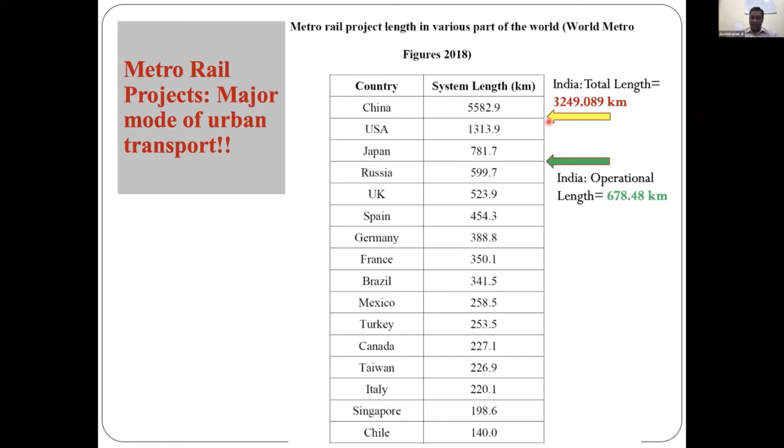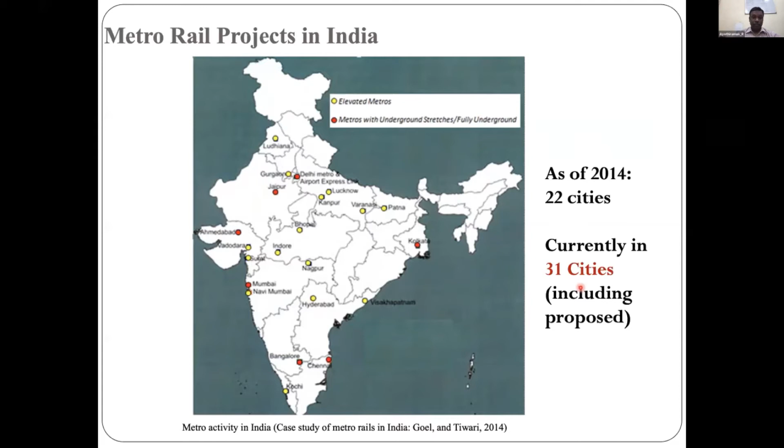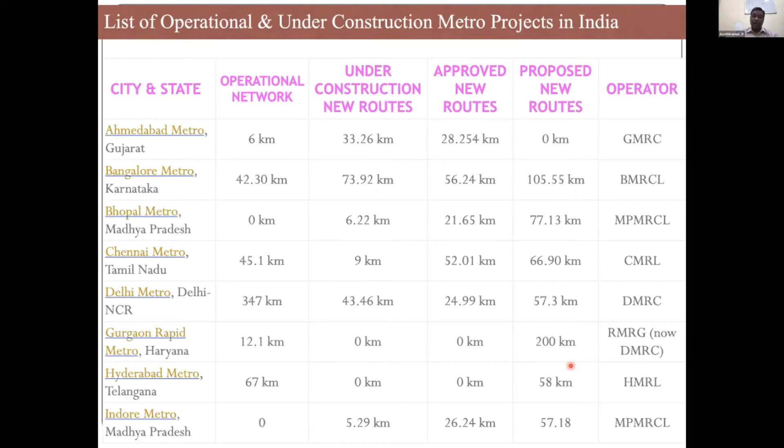So this is going to be one of the lifelines of transportation in the country. This table summarizes what is operational, what is under construction in several metro cities, and the approved and proposed ones. Even in the recent planning and budget, a huge amount of funds has been diverted for metro construction.

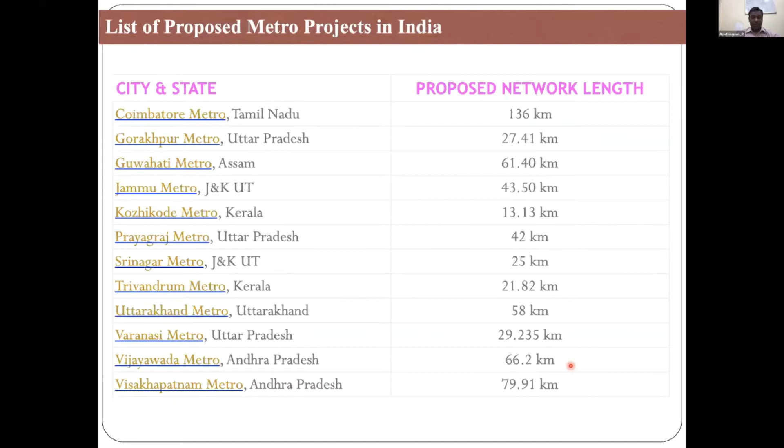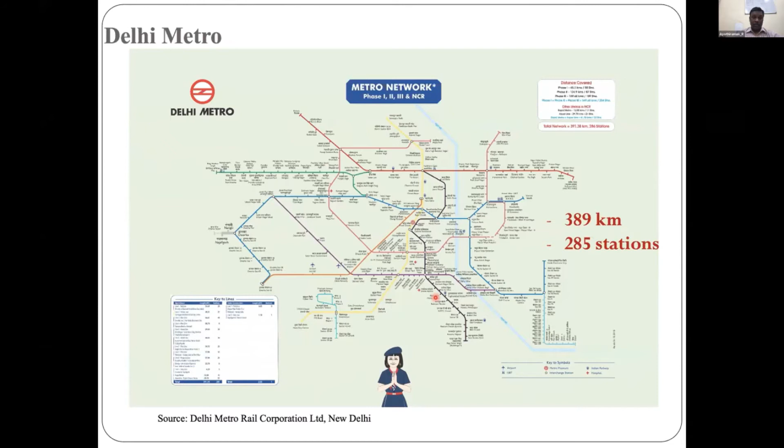So these are different cities where the status of the work is shown, and some of these cities are going to have metro projects for the first time. It is functioning very successfully. 389 kilometers of metro is functional, and especially there are several lines where underground tunnels were constructed. So these metro transports can be elevated or underground.

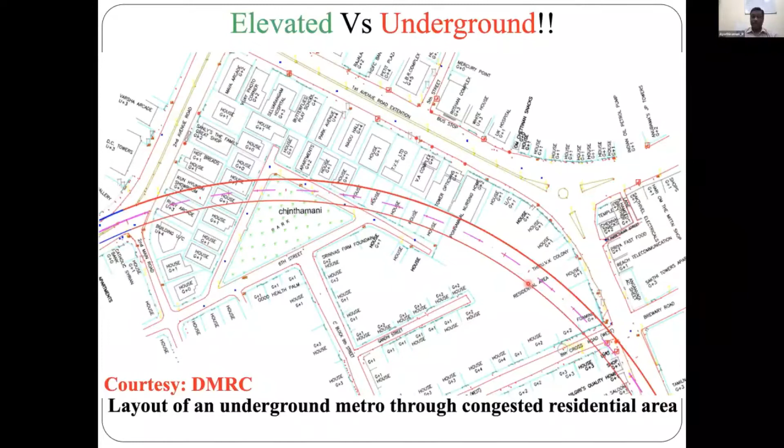Elevated is the more convenient and cheaper way of construction, whereas underground construction is the most challenging. But it is unavoidable to have underground metro construction, because you can see very densely populated residential areas, and you have to take the metro underground below these buildings. So the challenge comes in how to ensure the safety of existing buildings above this tunnel construction, and the construction cost and time also increase significantly. But without other options, we are forced to go for underground construction in some areas of the metro alignment.

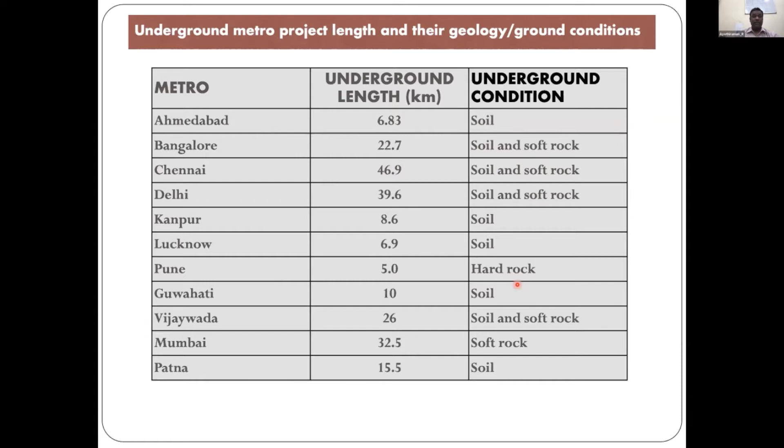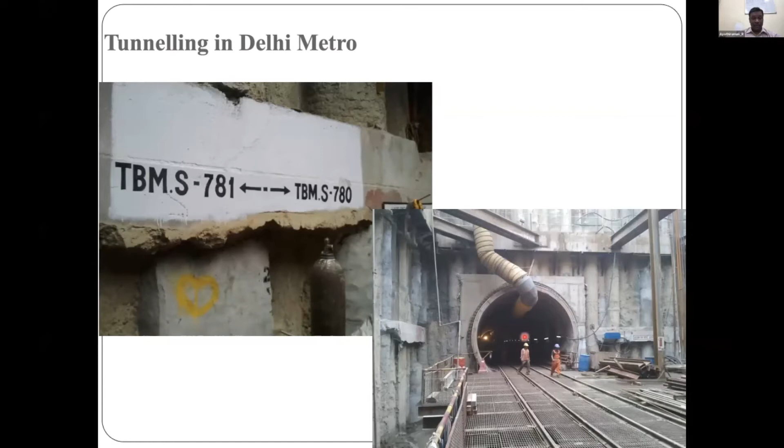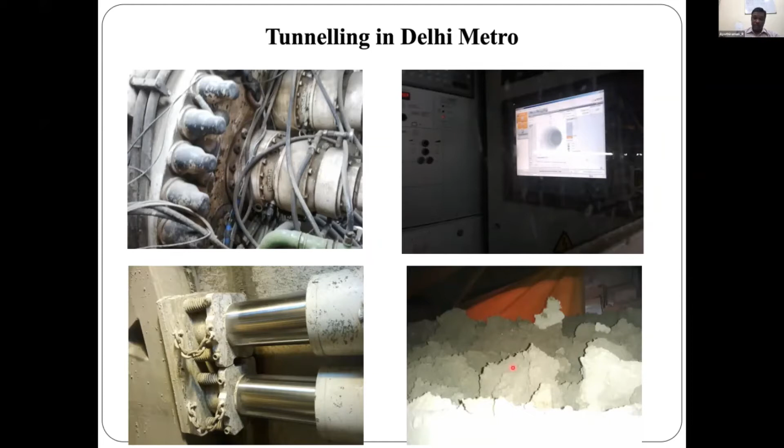What is the volume loss, how much face pressure has to be applied, and how much volume loss is happening - as a result, settlements are monitored at the surface, and segmental linings are installed by jacking. This is how the soil is collected through a muck conveyor belt and excavation is done. These tunnels have segmental linings which are finally connected together and installed by jacking.

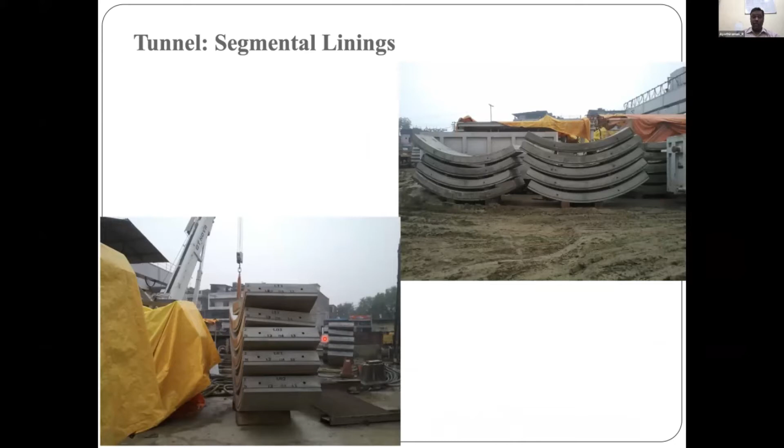So the major challenges in urban areas - since we are doing tunneling underground, there are structures above ground with foundations that come into close vicinity. We need to take care of their safety. There are two possible scenarios we can look at. One is during tunneling, how much damage would happen to the surrounding buildings and other subsurface structures and utilities - we need to protect them.

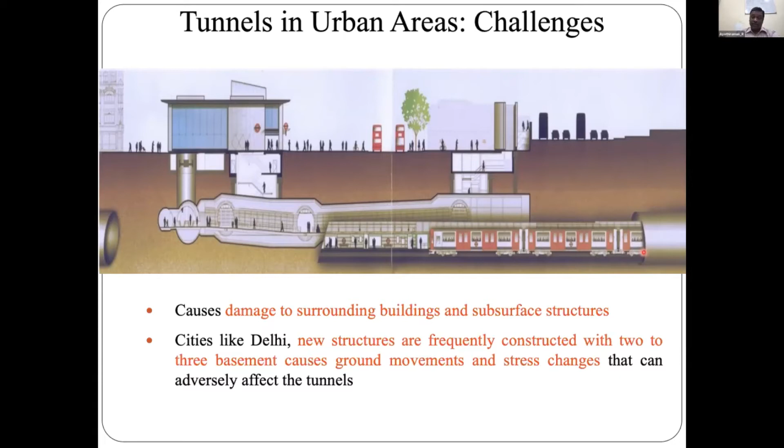Now you can see so many projects have already become functional. The other possible scenario is these tunnels already exist, and these tunnel and metro alignments have become a major point of attraction. So a lot of future development happens close to this metro alignment. Eventually any new construction activity can also affect the performance of the existing tunnel. So we need to assess and ensure the safety of the tunnels after construction as well.

So you can see the pile foundations are typically deep foundations, and the tunnels also vary from 10 to 30 meters in depth. They will come into close contact, and as a result they may have interaction. And if these tunnels are located in a seismically active region, then their interaction under seismic load also needs to be understood and designed for accordingly.

Nowadays buildings with basements are coming, so eventually they will also extend to relatively deeper depths. They can also have interaction with the existing tunnel. So we need to study the interaction of shallow foundations as well, both under static and seismic loading.

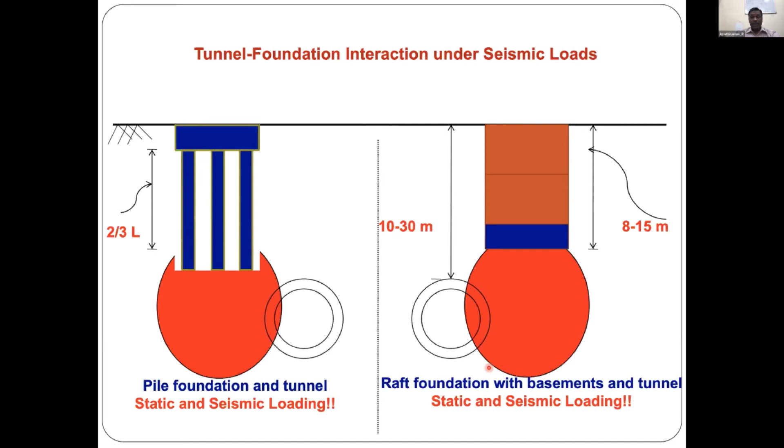All of us know in India what is the significance of seismicity. Some of the cities where metro systems are already functional come under zone 2 to zone 4. Delhi comes in zone 4 with a zonal factor of 0.24.

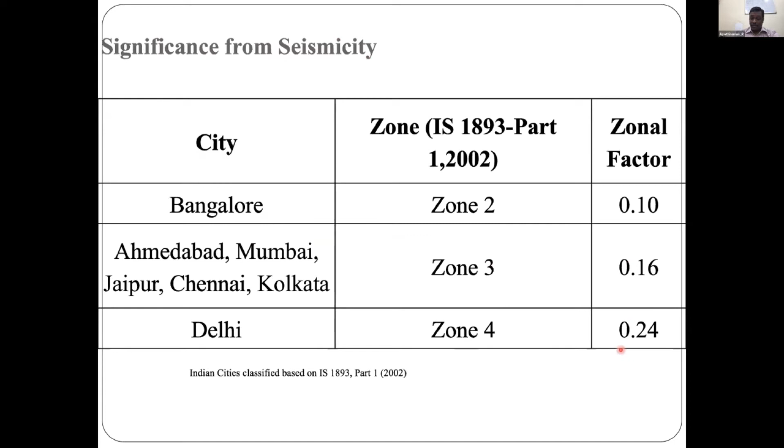What is the current state of practice with respect to tunnel design and its relevance? Generally people assume that tunnel structures, underground structures, are relatively safe compared to surface structures when subjected to earthquake load. But this has become a question because there are several case histories where earthquakes have caused significant damage to tunnels as well, underground tunnels included.

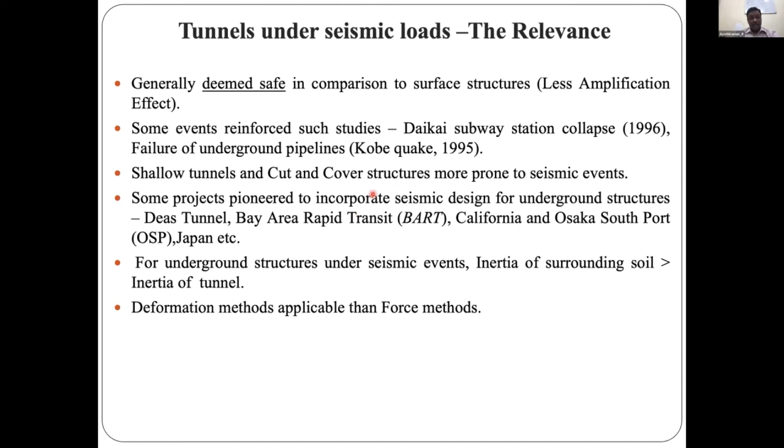Let us see some of the case studies highlighted in the literature. It is reported that these are the parameters that affect the seismic response of tunnels: one is the relative stiffness of the liner and the tunnel depth, and obviously the peak ground motion parameters of the earthquake, the duration, and the predominant frequency of the earthquake. These are the critical parameters affecting the performance and damage of tunnels during earthquakes.

There are 192 cases of tunnel failure that were analyzed and reported by several researchers, and we will see the summary of that.

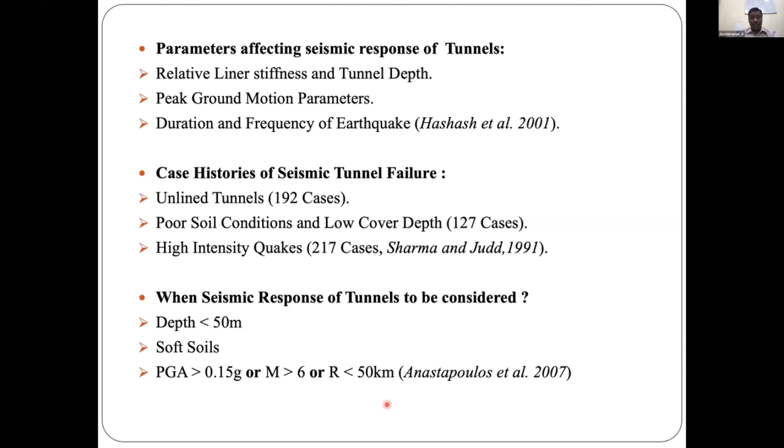Typically, when to consider the seismic response of the tunnel and take it into account in the design: whenever the tunnel depth is less than 50 meters, typically in soft soils, and if your PGA is greater than 0.15 G, or magnitude is greater than 6, or epicentral distance is below 50 kilometers, then we need to take into account the seismic design of tunnels, as follows.

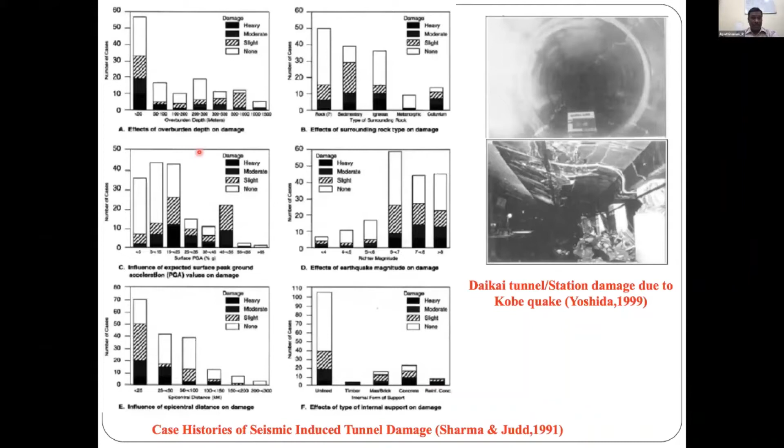These are the case histories which were analyzed to find out the causes of damage, whether it is the effect of overburden depth, the effect of surrounding rock conditions, the magnitude of the earthquake, how it caused damage to different numbers of tunnels, and what is the influence of the peak acceleration value on the damage, and similarly the epicentral distance. All these were categorically discussed by Sharma and Judd 1991.

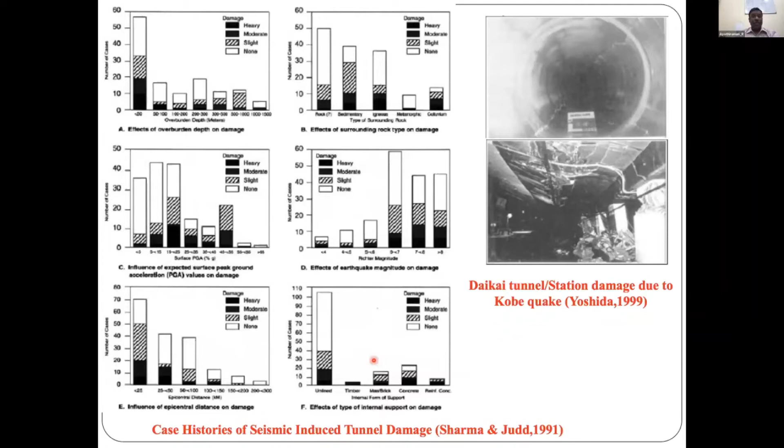So it clearly shows that tunnels do undergo damage during earthquakes, so we need to design them accordingly.

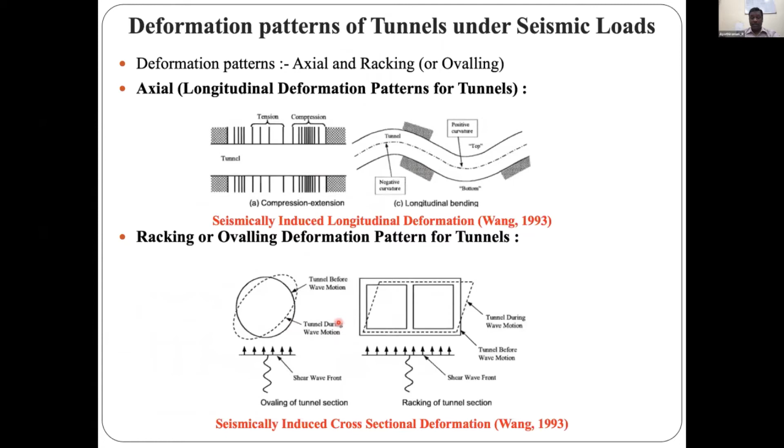So this is what I would like to summarize again: what are the different possible interactions that can occur. Of course, when you construct a tunnel in soil, that soil-tunnel interaction needs to be understood even under static load. But metro tunnels are typically at close distance.

They are twin tunnels, so therefore the interaction between the adjacent tunnel, the second tunnel, also needs to be understood, because the in-between soil, what we call the pillar width, plays a critical role in affecting the interaction between the tunnels as well. And of course, subsequently, there are two other types of problems.

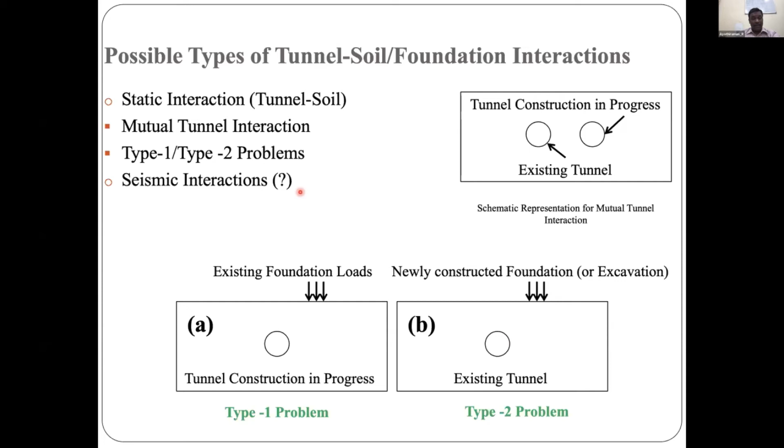Type 1 problem is where the tunnel is constructed, and what is the response of the existing foundations? Then the type 2 problem is where the tunnel already exists and there are new construction activities, whether excavation or foundation loading, and how they will affect the response of the existing tunnel. And of course, in seismically active regions, how the earthquake loading needs to be considered.

So today's presentation, I'll mostly focus on the seismic design related issues, not the static interaction part. The most common methods adopted in the analysis of underground structures are the quasi-static analysis considering the free field method assumptions. There are also closed form solutions given by Penzien and Wang, which can be used for a circular cross section of the tunnels.

Quasi-static analysis by the racking method, considering deformations, can also be used. We can do a numerical analysis incorporating this quasi-static approach as well, and then a time history full dynamic analysis can also be performed.

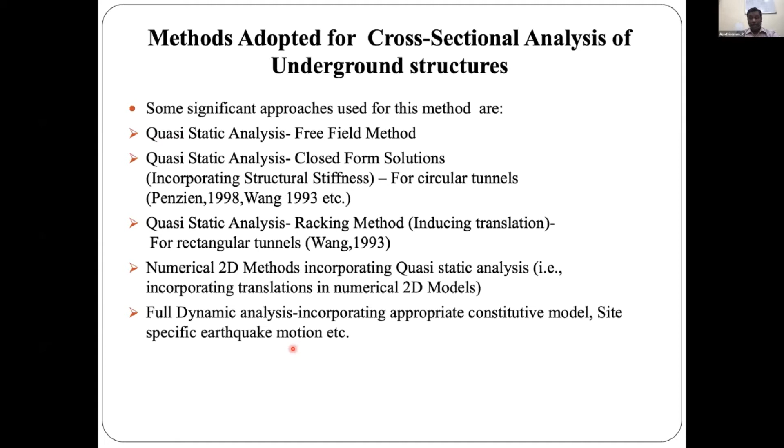So today we will be discussing the case study of Delhi Metro, starting from a pseudo-static approach to quasi-static approach and then a full dynamic analysis. We'll be talking about how different methods can give different results and which one would be most appropriate to use.

In tunnel design, one important factor we need to understand is the flexibility ratio, which represents the relative stiffness of the tunnel lining and the surrounding soil. This plays an important role.

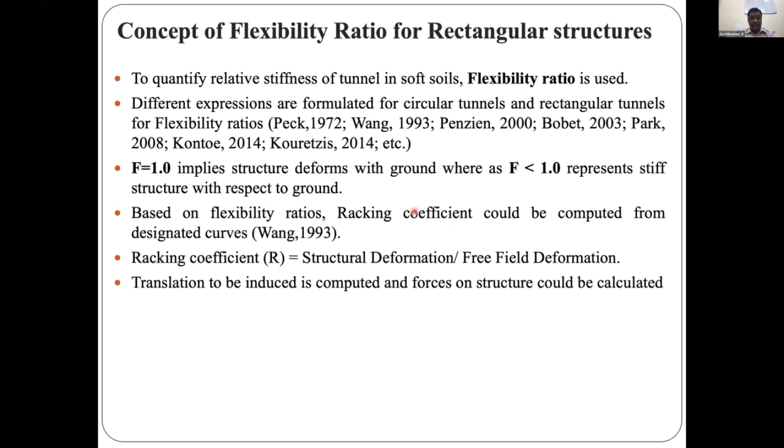There is a reduction factor, or racking coefficient, applied when we do the analysis and design using the free field deformation approach. The structural deformation to be applied for the racking analysis is obtained by multiplying the free field deformation by the racking coefficient, which is a function of the flexibility ratio.

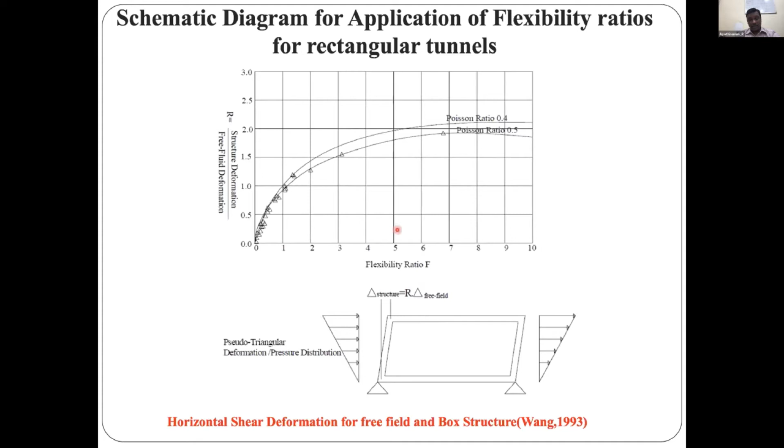Another challenge is the segmental lining being used, which has joints. What would be the effect of these segmental joints? For a realistic analysis and design, one must model the joint condition in the numerical analysis as it actually prevails in the field.

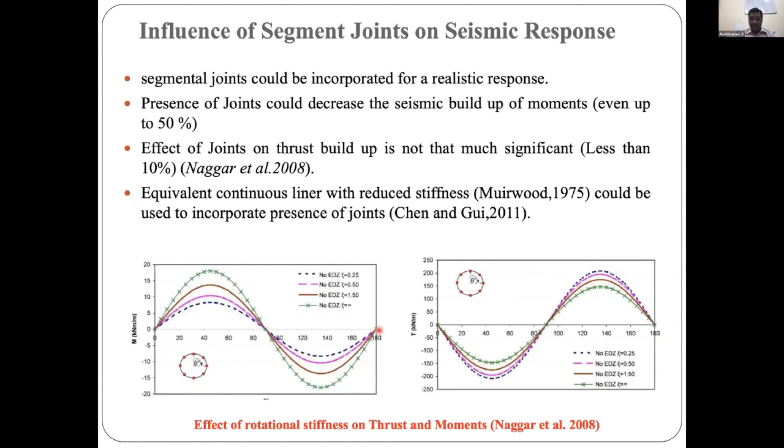Naggar has done an analysis and found that the joint stiffness does affect the moment and thrust that are mobilized in the tunnel lining. So in our Delhi Metro analysis, we did consider segmental joint modeling.

In soil engineering problems, simplified elastic analysis or elastoplastic analysis, the soil constitutive model does affect the final output of moment and thrust coming on the liner. So we have to choose the constitutive soil model very judiciously, depending on the actual soil condition, for a more representative result.

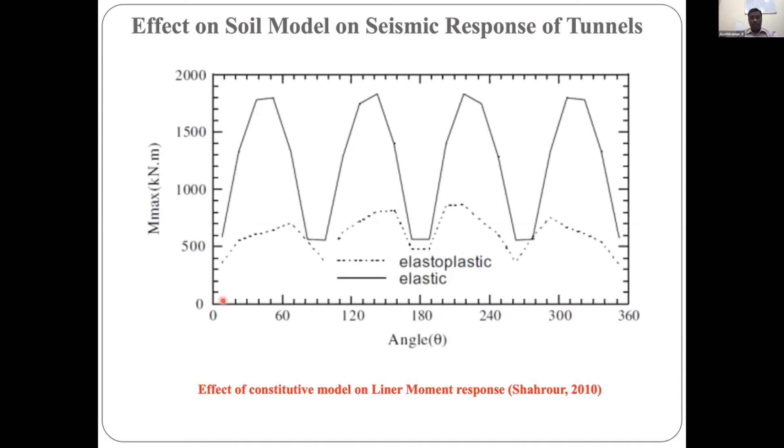Modeling the behavior, some full dynamic analysis results reported in literature show that as the PGA increases, both axial thrust and bending moment on the lining increase.

But again, this thrust and bending moment need to be reduced depending on the flexibility factor, because flexibility is one of the important factors. So they can be reduced based on the flexibility value.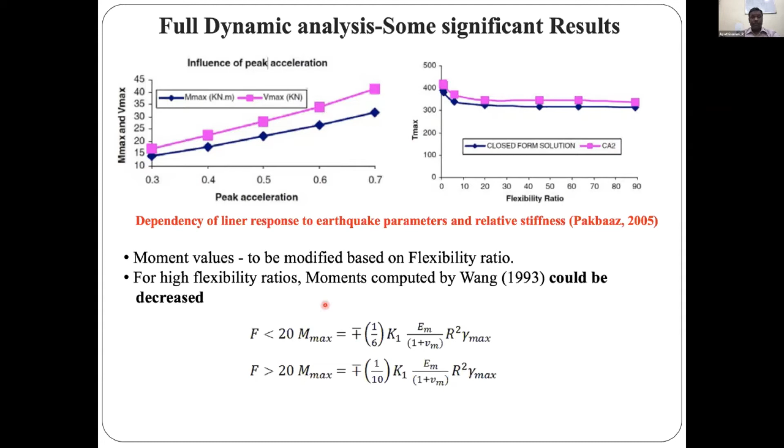Certain parts of Delhi have a shallow water table and sandy, liquefiable soil conditions in the Yamuna River Basin. So we had to arrive at different constitutive models for liquefiable and non-liquefiable soil conditions, and these parameters have to be site specific. For seismic loading, we also have to get the damping characteristics to be very representative.

The challenges are how to arrive at site specific ground motion characteristics and how we are going to simulate the segmental joints in the modeling. Also, we should be able to ensure the face stability, which is actually obtained in the TBM machine by applying appropriate face pressure.

Even numerically, you need to apply appropriate face pressure value in order to simulate conditions close to the field. The segmental linings are installed by jacking - even that has to be numerically simulated, and how much jack force we should apply in the numerical analysis is also a big challenge.

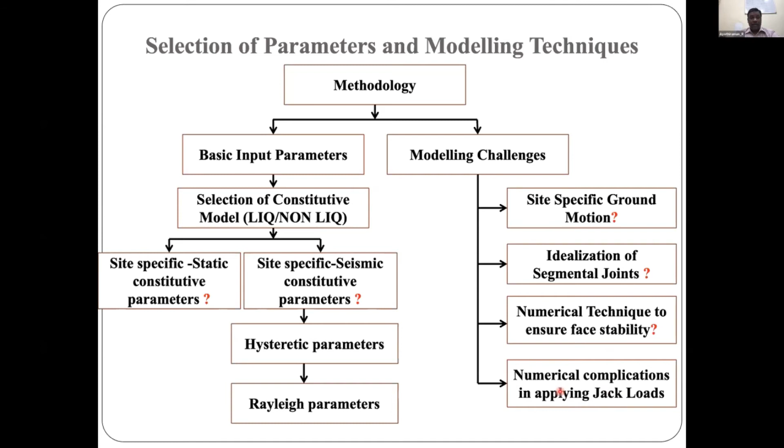So these are the things we have simulated as close to the field condition as possible in our analysis and design. We have to arrive at these parameters because most conventional geotechnical investigation reports will only have an SPT profile.

We did have a shear velocity profile for select locations in the Delhi region, but if not available, we used correlations to convert from the SPT value to arrive at the shear velocity profile.

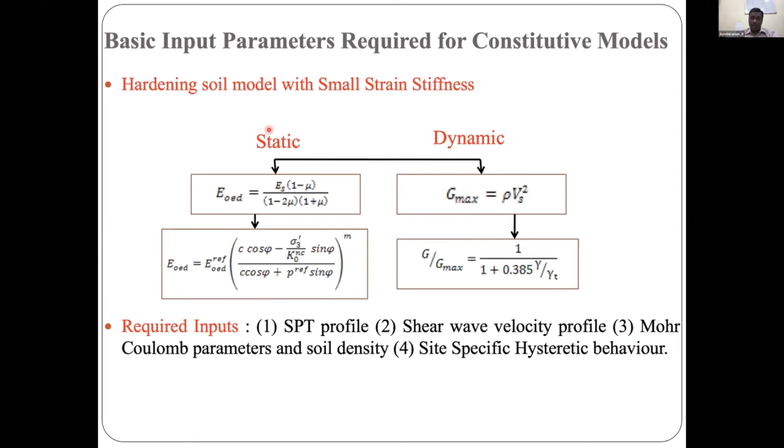We have used the hardening soil model with small strain stiffness for Delhi soil conditions. The other dynamic characteristics were obtained from the Hanumanthrao and Ramanna equations, developed for the Delhi region. The hysteretic behavior was assumed using the lower bound sand given by Seed's solution, and these are some of the properties used.

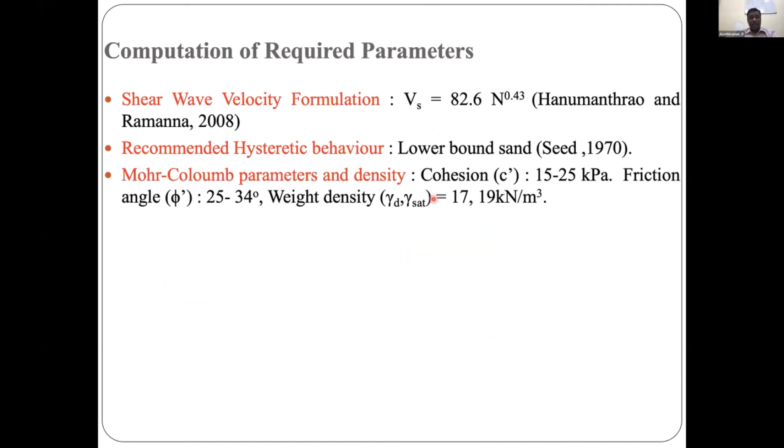We have idealized the whole of Delhi into three types of idealized soil profiles, for which we have carried out the analysis.

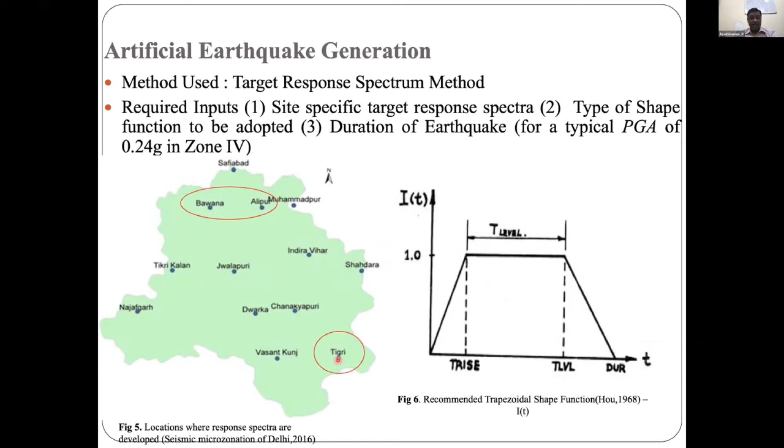Instead of going for a zonal factor for time history analysis, you need artificial ground motion which is synthetically generated. For that, we have used the target response spectrum method for developing a synthetic ground motion for the Delhi region, using the NDMA guidelines, considering the Bawana and Tigri faults. We developed the synthetic ground motion time history, which for a particular target spectrum closely matches the ground motion giving the same response spectrum.

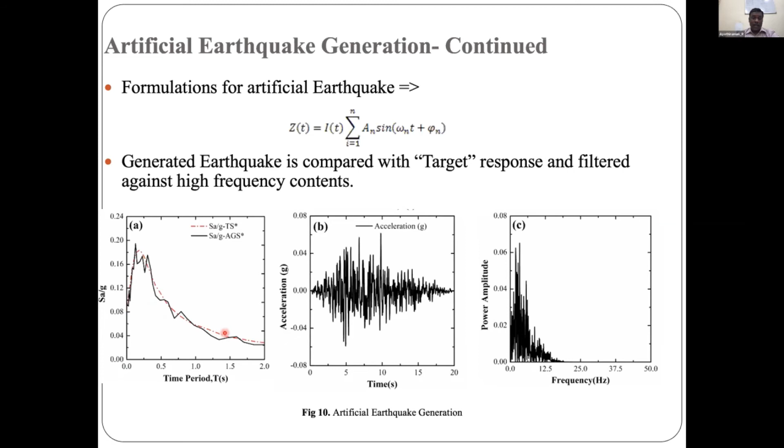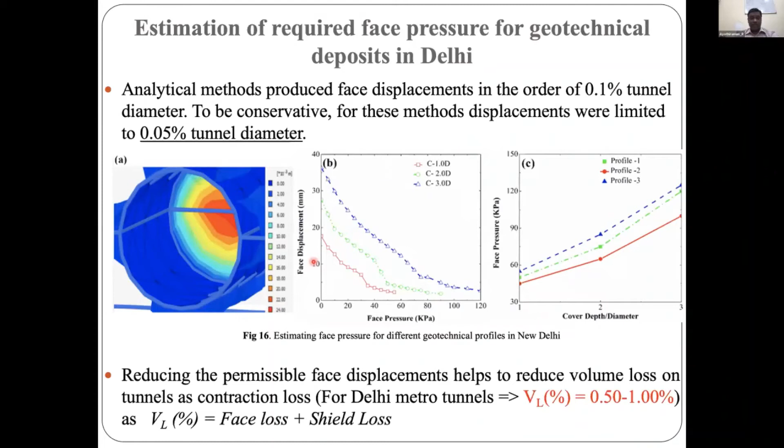This synthetic ground motion was eventually used in the time history analysis. We can see how the face pressure needs to be obtained for different cover depths, because as the cover depth increases, the face pressure required to be applied increases. When the face pressure increases, the face displacement will reduce. The idea is to apply a pressure which will have a minimum face displacement, so that the volume loss is restricted to the limiting value, keeping surface structures unaffected.

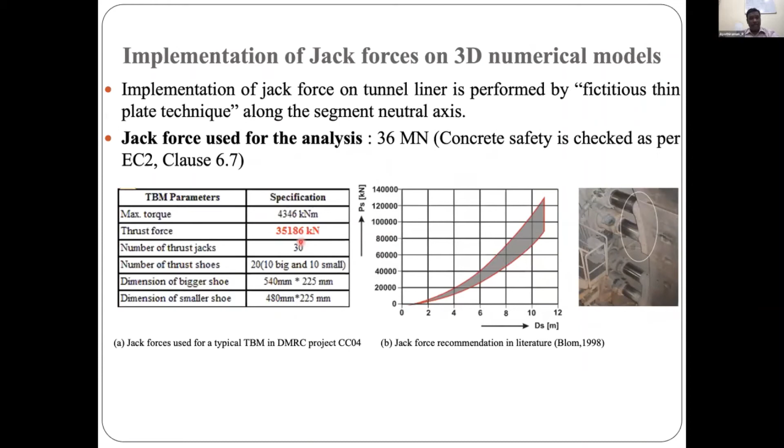The jack force applied in Delhi Metro was also quantified based on the recommendations of Blom. We verified how much jack force is being applied in the Delhi Metro conditions, which is almost 36 meganewtons.

We initially started with the free field analysis. In Delhi, the bedrock varies from 10 to 80 meters, which is quite significant. Finally, we analyzed three different bedrock conditions. This is the shear strain variation with depth for different bedrock conditions, and for different ground profiles that we idealized based on a large amount of geotechnical data. We can see how the shear strain varies with depth.

We can also see the spectral acceleration at the surface and the spectral acceleration 7 meters below the surface. That's why the underground structures experience relatively less spectral acceleration, and are normally assumed to be safe. For the Delhi region, the actual acceleration based on the synthetic ground motion is well within the design spectra.

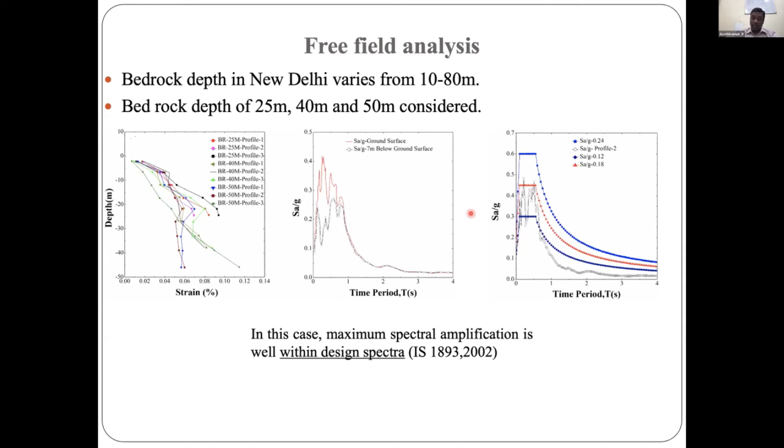But this is for the free field condition. The moment we bring in the tunnel and foundation system, they behave in a totally different way.

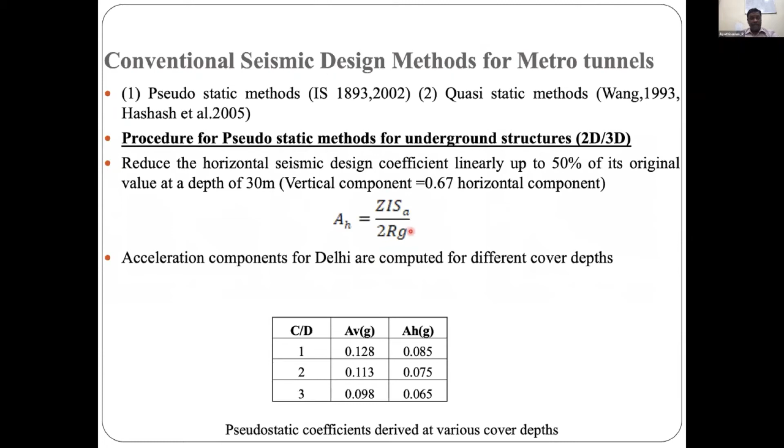Initially, a pseudostatic analysis was done as per IS 1893. We also did some validation problems comparing the Wang solution and the Hoeg solution. We can see that the liner thrust and bending moment obtained were comparable to the Wang solution, showing that the numerical analysis is capable of capturing the tunnel lining behavior.

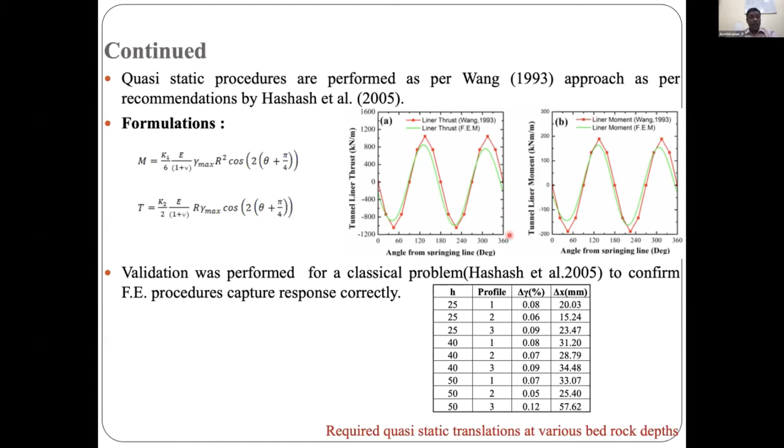We can compare the pseudostatic bending moment applied and the quasi-static analysis. We always find that pseudostatic gives much higher bending moment, giving very conservative forces. This red line shows the moment for which it is actually designed, based on the jack forces and other installation forces. That's why the lining seems to be safe, because even though there is an increase in bending moment, the handling stresses and installation forces actually govern the design.

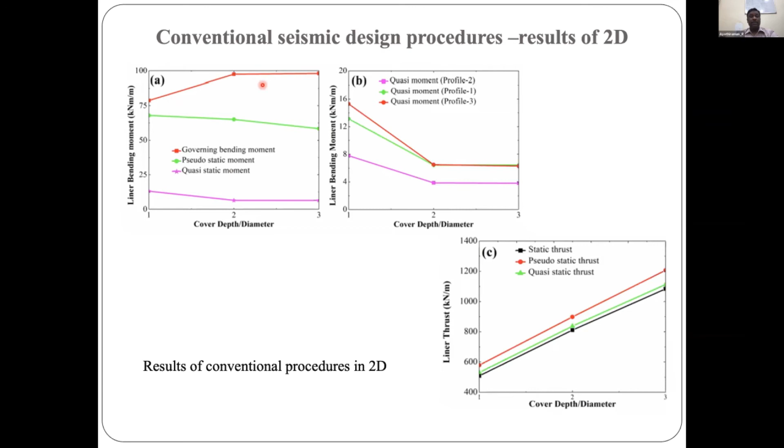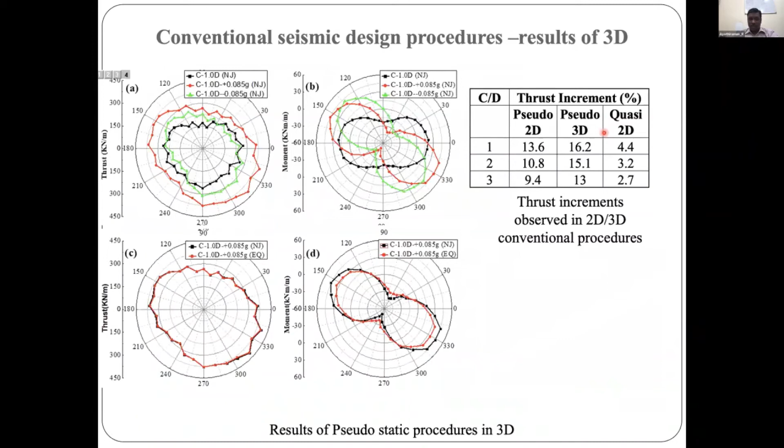But there are other challenges which need to be cautiously monitored, which we'll discuss in subsequent slides. We can see how the thrust forces using pseudostatic 2D and pseudostatic 3D can vary, but with the other approach it's relatively less.

Coming to the full dynamic analysis, we modeled it as per the conventional explicit method of analysis, choosing the dimension of mesh and everything. We can see an increase in thrust with time, but overall there is not much increase in the thrust force and moment considering the dynamic force. Even the effect of joint stiffness is not significantly affecting the forces.

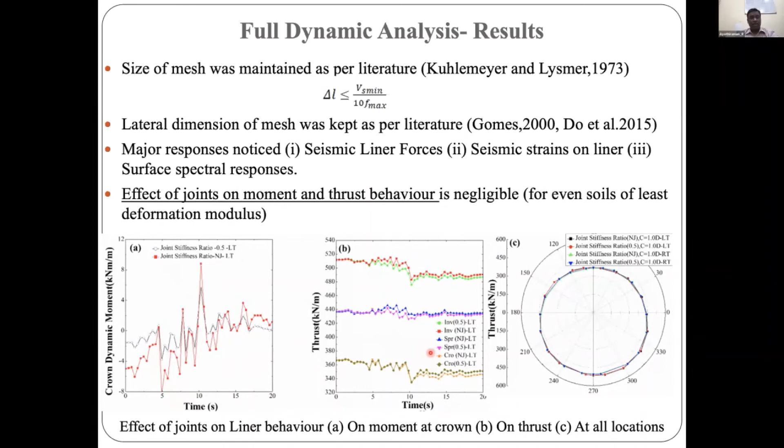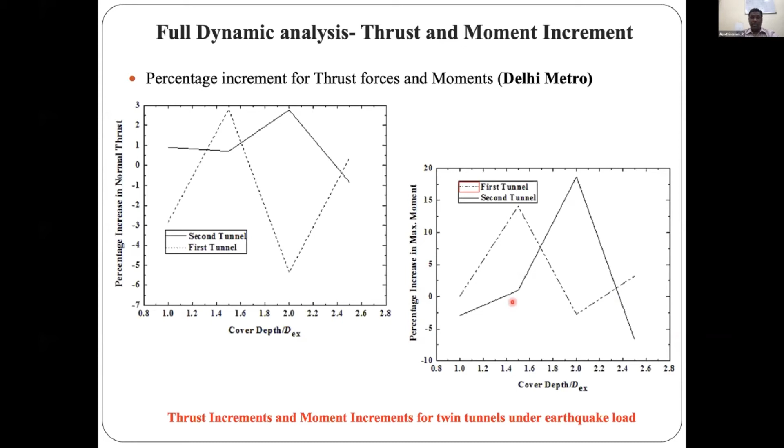So for practical purposes, the joint stiffness condition can be neglected for a quick analysis and design. The increase in thrust is hardly 3 to 5%. But of course, when you do sequential tunneling, the variation for the two tunnels is not the same, with different forces, both moment and otherwise. So you have to simulate the twin tunnel construction sequence in the modeling as well.

We can see that most of the time the increase in thrust and the bending moment are well within the design envelope, the positive bending moment for which we have to design. So the increase in forces are well within the design moment and the design thrust.

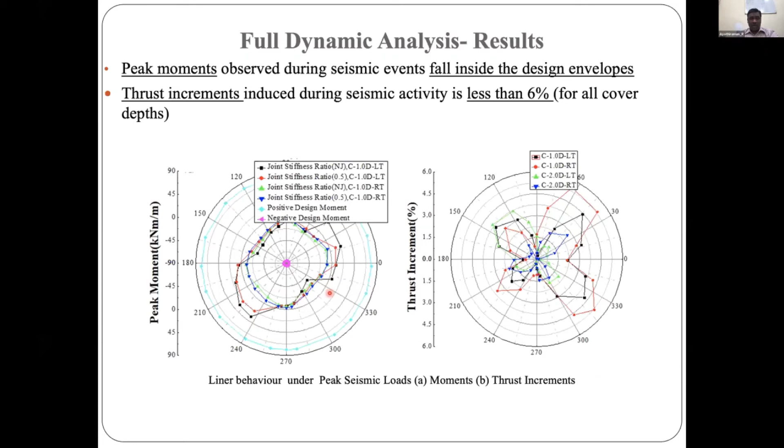So nothing to worry about the design forces, but we need to worry about the dynamic strain level built up on the lining due to earthquake forces predicted in full dynamic analysis, time history analysis. Along the circumference of the lining, the two solid lines show the strain limit specified by IS 456 for concrete, and you can see that they are certainly being exceeded.

The exceedance of strain level in the lining may eventually lead to a crack in the tunnel lining. These tunnels are underground and maybe below the groundwater table, so slowly there will be water ingress into the lining, which may deteriorate the reinforcement. There will be long-term deterioration of the tunnel lining, which needs to be carefully monitored, and appropriate remedial measures taken. So the major finding is that the strain level on the lining needs to be monitored.

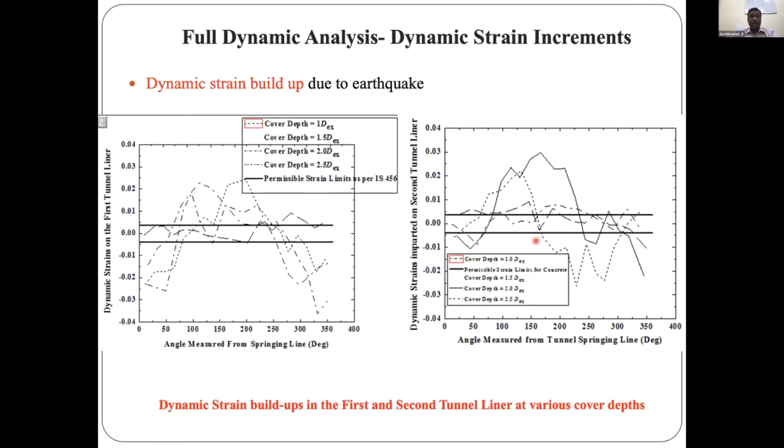This is clearly seen in how the strain level varies for different cover depths. When it is a shallow tunnel, the strain on the left and right tunnels are well within the limit of the concrete. As the depth increases, they become comparable. And at a deeper depth, both left and right tunnel strains are much beyond the permissible limit specified by the IS code.

So we have to be really watchful depending on the geometrical conditions, where to put a monitoring of the strain level, and whenever the strain levels are alarming, what remedial measures need to be taken. So we need to worry about it.

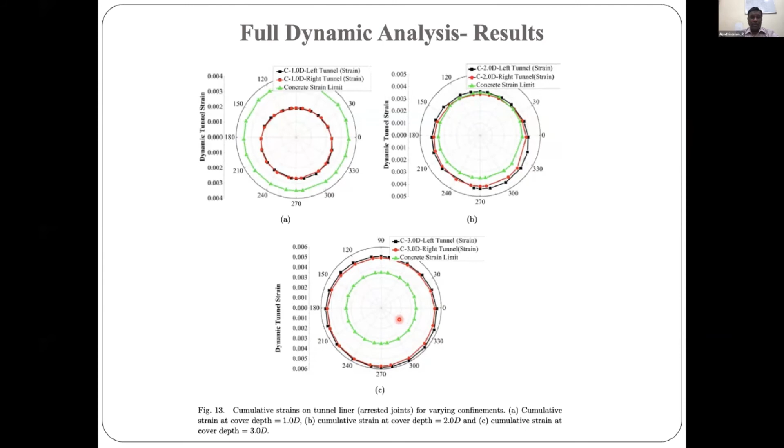Another thing is that the accelerations are well within the IS code specified spectral acceleration limit. But under the presence of a tunnel, there is a channelization of seismic energy, and we find that the acceleration in the pillar width region has exceeded the IS code spectra. That means any structures located between tunnels need to be designed for higher spectral acceleration. If you follow IS code guidelines, they may be in danger. So we have to be watchful when designing any structures between tunnels in the pillar width region.

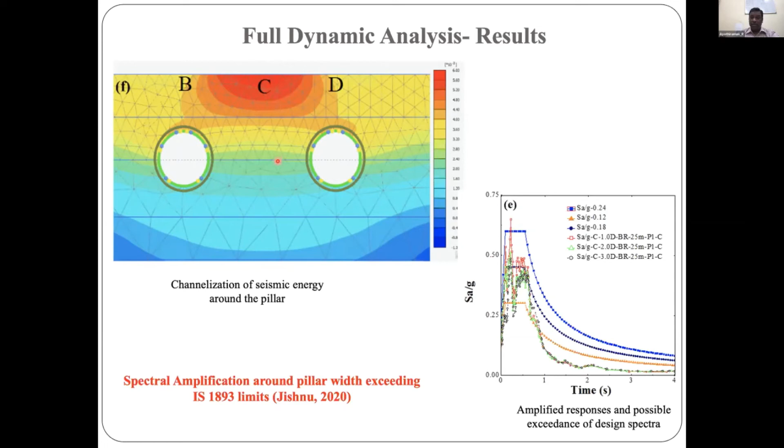We then went further to study the interaction of the tunnel-shallow foundation system, simulating different geometrical sizes and foundation aspect ratios. We can see that under the presence of a tunnel, since the tunnel is a stiff member, the load capacity increases, so there is an increase in bearing capacity.

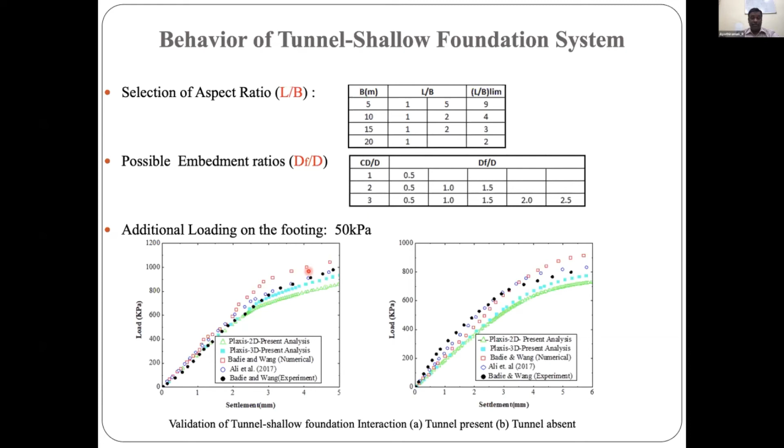So if you neglect the tunnel, you are on the conservative side for bearing capacity. But if you want to economize the design, you can account for the presence of the tunnel and consider an increase in bearing capacity. The only thing is, during excavation there is a sudden drop in settlement behavior - when tunnel excavation is happening, settlement on the footing increases. But after the tunnel is constructed, there is again an increase in capacity compared to the load-settlement behavior without a tunnel.

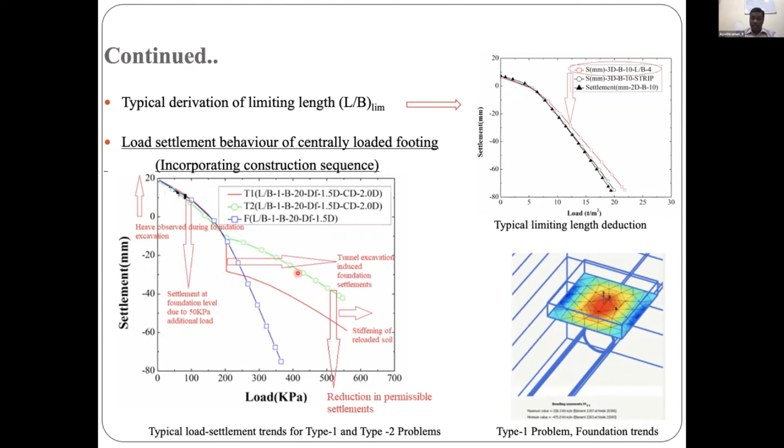So during tunnel excavation, one has to be careful that settlements are not increasing. But if the tunnel is already there and you are constructing a foundation afterward, we need not worry. The green line is the post-tunnel construction case, where you can see how bearing capacity increases significantly compared to the no-tunnel condition. So if you are interested in taking advantage of the tunnel's presence, you can do that, but you have to come up with an estimation through proper numerical simulation.

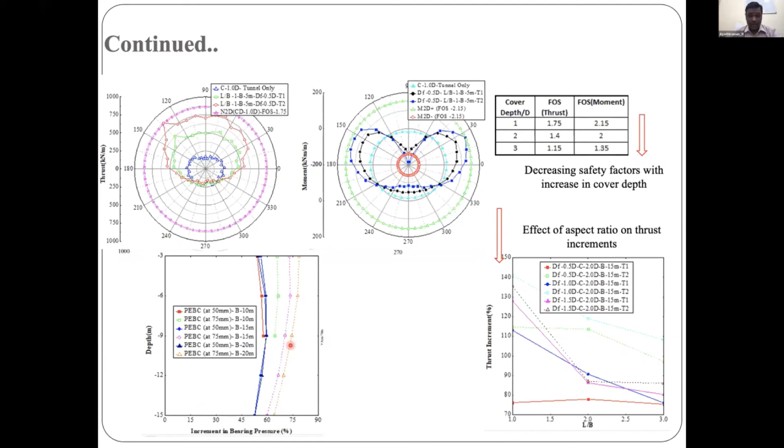When it comes to dynamic load, we can see that the free field acceleration is somewhere here. But when the shallow foundation is there, in the vicinity of the tunnel, we see that the acceleration gets amplified, especially at a shallow tunnel condition. You see that the maximum acceleration is there. So we can see that.

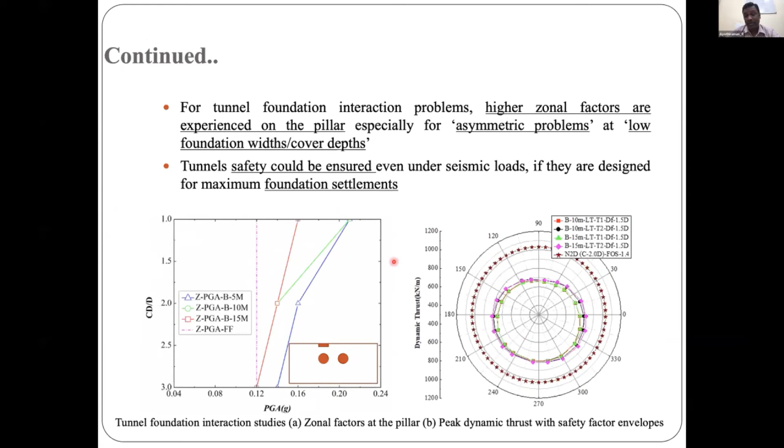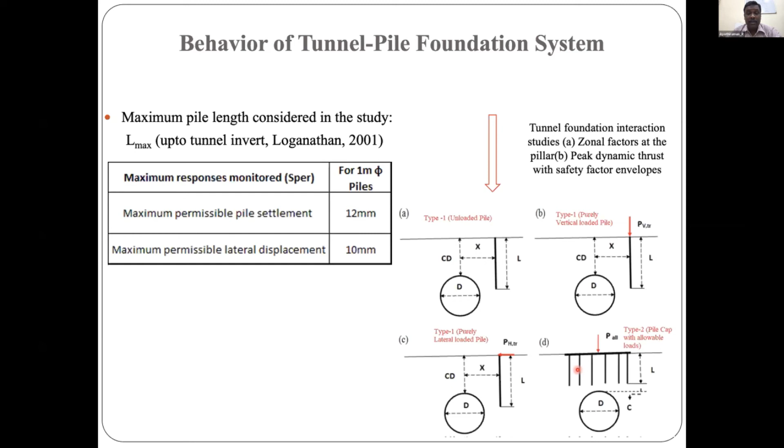We did also a validation problem by comparing Loganathan's data reported on the pile behavior. Then it is found that there is a large displacement around the pile and the tunnel for a distance, and they are typically well within the 45-degree line from the springing line.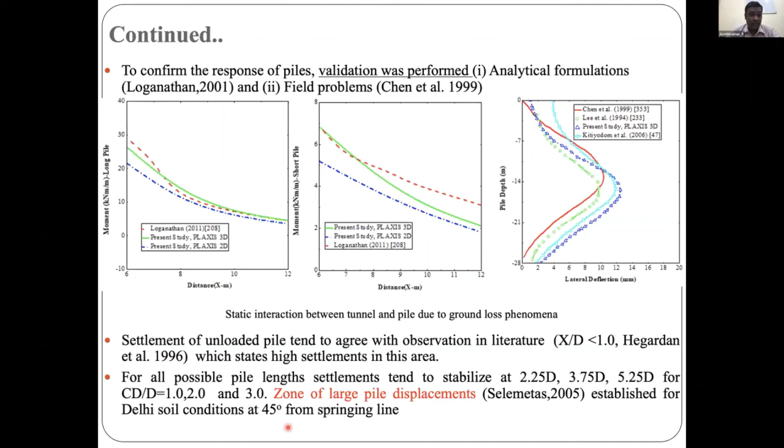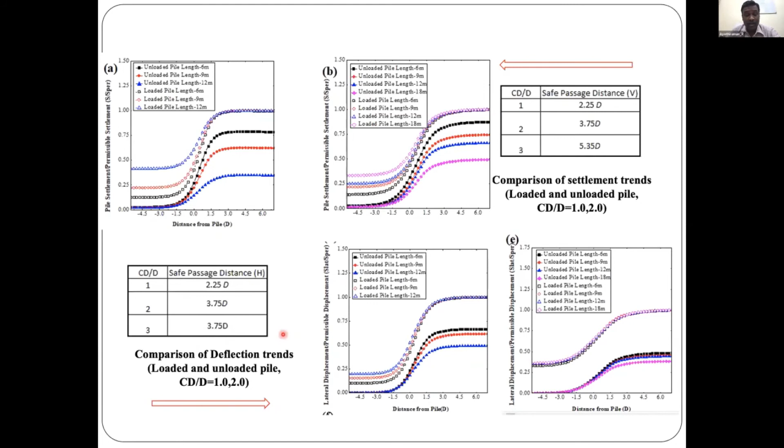So the critical distance for different cover depths were established. Obviously for a shallow depth, they reach the maximum settlement at a very close distance. At a deeper depth, because of confinement, you see that maximum settlement is reached relatively at a long distance between the pile and tunnel.

Even the dynamic analysis indicates that the settlement is less because of the stiffening effect provided by the tunnel. And also when the pile group width increases, the settlement decreases. That group spectra again is totally different from the free field spectra because of the presence of the stiff elements, that is both pile as well as the tunnel.

They have a different relative stiffness. As a result, the free field response spectrum is totally affected. You can see this is the free field, and this is under the presence of the tunnel and pile. So the frequency content and everything gets shifted. You can clearly see that.

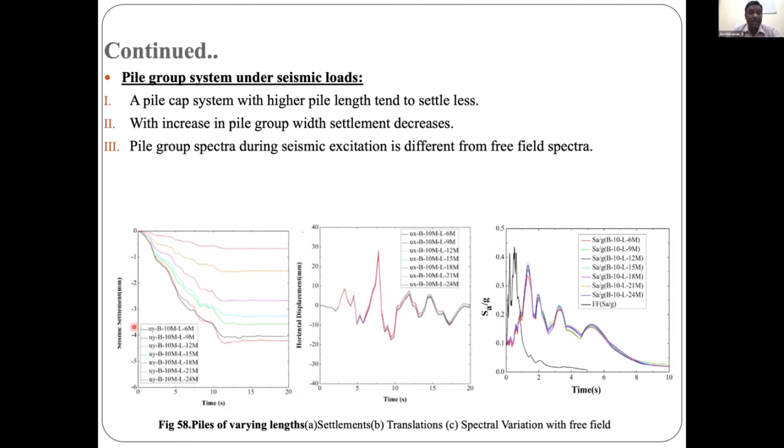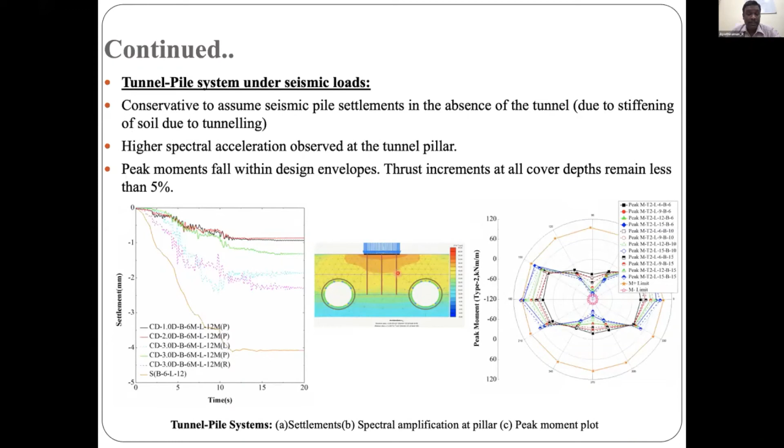Seismic settlement seems to be less, only 3-4 mm, which can be neglected. And again, the same channelization effect is happening. The spectral acceleration in the pillar width area is increasing. So as a result, the forces, although settlement is less, the forces coming on the tunnel, the pile, and the pile group, are increased. So therefore, we need to check the pile design for these additional inertial forces that are coming in the pillar width area. So that one has to check.

To summarize, we may use pseudostatic methods, which are most commonly used in industry, which may be conservative in giving the liner forces, basically thrust and moments. But the challenge is it cannot give the time variation of these forces, and especially the strain and displacement, other things cannot be predicted by this method. So although it is conservative, with respect to deformation and strain, it doesn't give any information.

We may use the closed form solution as well for a typical cross section of circular tunnels by Wang, but Wang's method seems to give a better solution compared to the Penzein method. So for ideal cross sections, we may use the Wang solution as well.

Of course, the full dynamic analysis is always more rigorous, and it can simulate the realistic conditions, all the construction sequences. But again, your results' accuracy is a function of how accurately you are modeling the site-specific ground motions, what is the appropriate constitutive model that you have adopted, and also how accurately you have simulated the construction stages. So accordingly, your results will be varying. But the most critical output that we have found is the dynamic strain is actually increasing for certain geometrical conditions and loading conditions, which is really alarming.

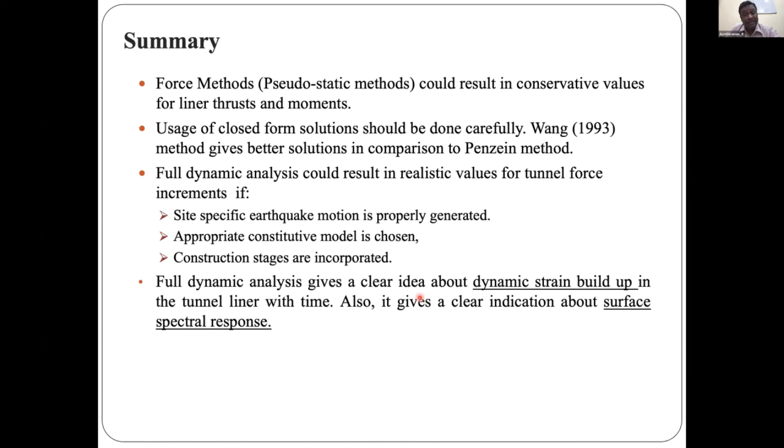You need to monitor the critical sections identified, and whenever the strains are increasing, we may need to go for appropriate remedial measures to be adopted. So with this, I thank the organizers for giving me this opportunity to interact with the delegates attending this conference.

Thank you, Professor Ayothiraman. Excellent presentation, I must say, and very lucid. We have a few questions. Are you able to see those questions, or should I read them out for you? I am able to see that. Great, so thank you very much for this huge amount of work.

My question is, could we consider radial or horseshoe-shaped tunnels more efficient to resist earthquake loads compared to other cross sections? As I mentioned, the earthquake-induced forces are coming, and the increase in thrust and moments is kind of nominal only. Of course it depends on the flexibility. For the Delhi region, the soil conditions are relatively dense and stiff. If you see Delhi, especially where the underground metro tunnels are, the N value is slightly large. So in this case, we found it to be marginally less, but there can be increase in force as well, as we have seen in some cases. But the installation forces, like jack forces and other handling forces, are already governing the design forces. So I don't think the shape of the tunnel would be significant in terms of design forces. But the strain level would be totally different. Right now we have done this for a circular tunnel. If you come up with a horseshoe or other shape of tunnel, the strain developed on the lining would be different, which we need to study.